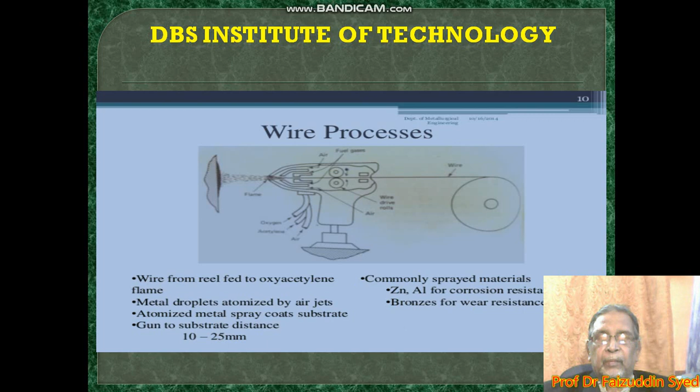Today I am going to teach you about surface engineering. Now you can see the metal spray process in detail. This is a wire spray process. Here we are using a wire, that is, the wire you will have to coat with. Maybe zinc, aluminum or whatever it may be.

So we are using a wire, and for the melting purpose we are using oxygen and acetylene here, and we are using a gun. On the left side you can see the job, what we call the substrate. The process is like this. The wire is fed from a reel to the oxyacetylene flame inside the gun.

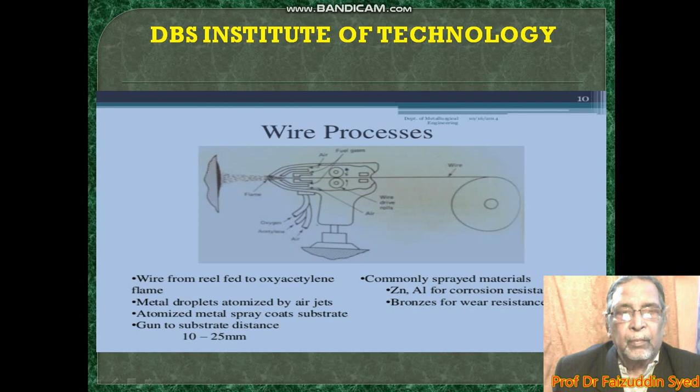Then the wire is melted, becomes droplets and is atomized by air jets. Then the atomized metal spray coats the substrate, that is the job. You will have to maintain a distance of 10 to 25 millimeters between the job and the gun. The commonly sprayed materials are zinc and aluminum for corrosion resistance, bronze for wear resistance, and some other materials we can also use here.

Now you are seeing some of the mechanical parts here. These parts are really costly. So when these parts wear off, we spray over them, that is metal spray. For wear applications we can spray up to 1.25 millimeters, for corrosion it is 25 microns, and the maximum thickness we can do is 6 millimeters.

The deposition rate for this process is 93 square meters per hour, per 25 microns. The flame temperature we will maintain here is 2760 degrees centigrade.

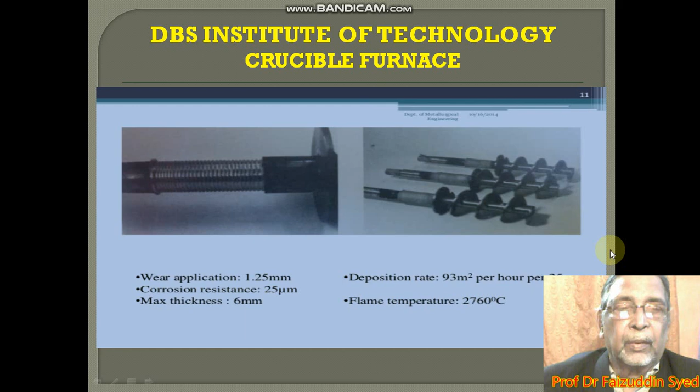This is another method called powder spray. We are seeing a diagram here. See, this is also just like a spray gun. Over the spray gun there is a bowl where we can feed the powder. On the extreme left side there is a job. How does this work? Powder is fed instead of wire here. An oxyacetylene torch is modified for powder feed.

No high pressure air to assist atomization. You are not using any high pressure for the purpose of atomization. Low deposition rate, lower bond strength and higher porosity are obtained here. It's a very easy method for materials that cannot be made into wire.

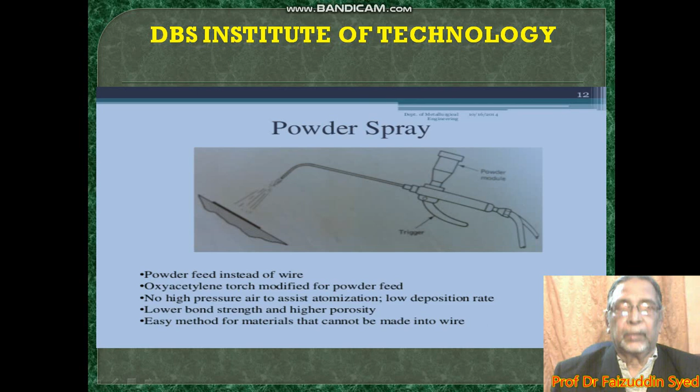This is a metal spray gun where we are using powder, not wire. You can see the metal spray gun here. Above it there is a hopper for pouring the powder. At the back you are seeing the hoses. From these hoses oxygen and acetylene gas will flow, and it will give an oxyacetylene flame.

So how does this process work? It is more sophisticated equipment used with compressed air. You need compressed air to increase the atomization of the particles. So in this process you will get higher deposition rates and bond strength. The flame temperature will be 2500 degrees centigrade. What coatings can we do with this? We can make carbide coatings, high alloy steel coatings, ceramic coatings, and many others.

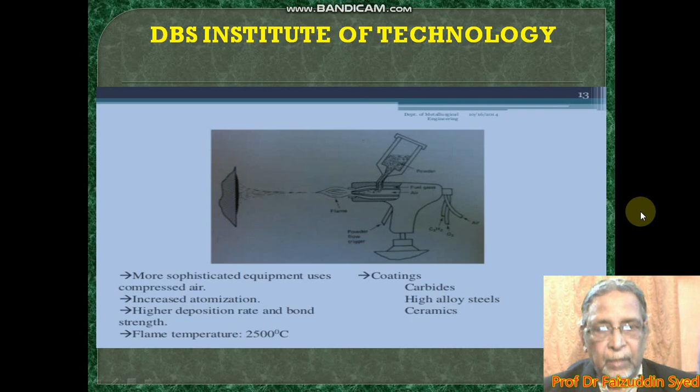Now you are seeing a special gun called the detonation gun, D gun. This gun is used for spraying carbides and ceramics. It gives high bond strength and coating density with good surface finishes. But this process makes a lot of noise. You should do it in a soundproof room.

So how does this process work? The powder is fed inside the gun, and you can see in the gun there are three valves. One is for oxygen, another for acetylene, and the third for nitrogen. The powder is fed under small gas pressure. Explosive mixtures of oxygen and acetylene are detonated using a spark. You can see a spark plug over there. The explosion is formed by the sparks.

The temperature is 3870 degrees centigrade. The detonation is 4 to 8 times per second, at 730 meters per second. Nitrogen gas is used for flushing the detonated gas. The maximum coating thickness we can do is 75 to 125 microns.